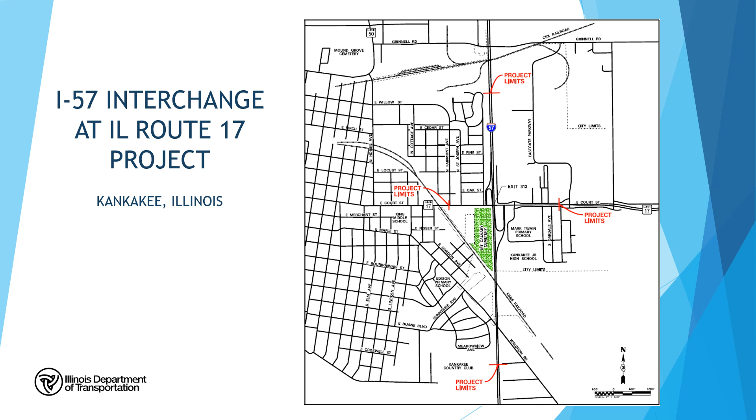Our study area included 1.87 miles on I-57, beginning just south of the structure carrying I-57 over the CSX Railroad, and extends about 1/4 mile south of Waldron Road. On Illinois 17, the project limits include 0.75 miles of roadway that runs from North Fairmont Avenue to Eastgate Industrial Parkway.

The purpose of the public involvement is to present the approved alternative, answer questions about the project, explain land acquisition procedures, and receive public comments.

The need for the proposed design stems from the existing ramp geometry not meeting current IDOT design policy. The existing I-57 structures over Illinois 17 also provide less than the desired vertical clearance, but do meet the minimum to remain in place. Both bridges for I-57 over Illinois 17 are in acceptable condition, but less than optimal. The proposed improvement will help improve roadway design elements, improve traffic flow, and increase safety.

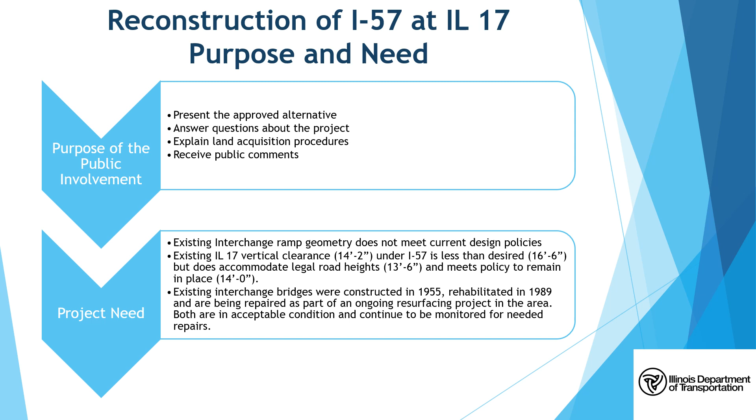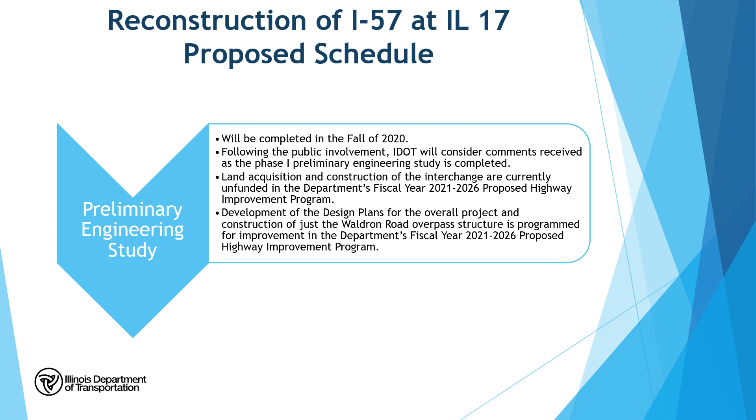This fall, the preliminary engineering study will be completed along with the preliminary Phase 1 design plans. The intersection design study has already been approved. After this, the project will move on to Phase 2. During Phase 2, the final construction plans will be prepared. The Phase 2 work is funded in the 2021 to 2026 proposed highway improvement program. However, only the Waldron Road improvements are funded for construction at this time.

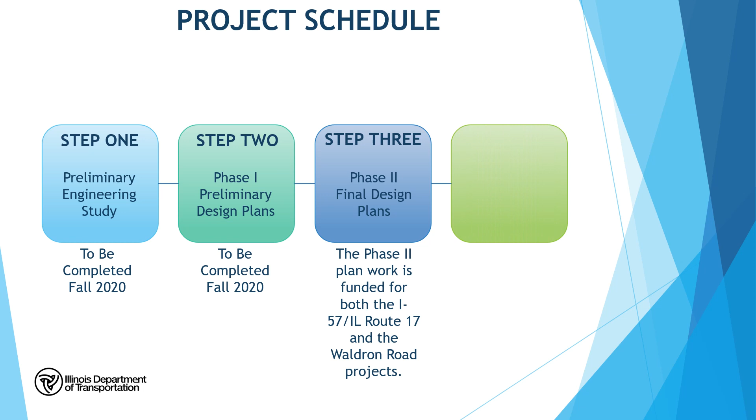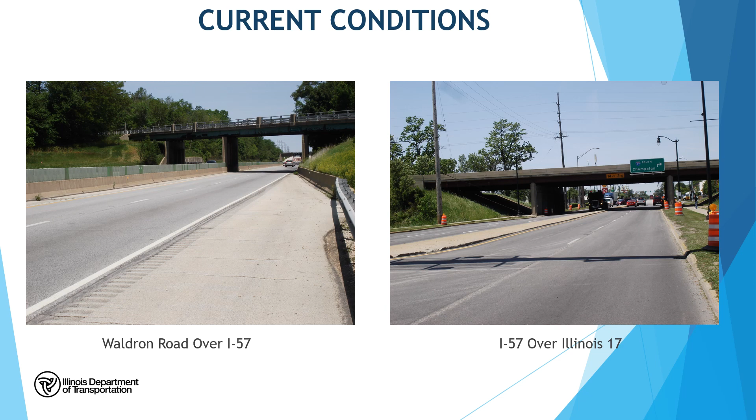These are the current conditions at I-57 and Illinois 17. This is the current layout of the I-57 on and off ramps.

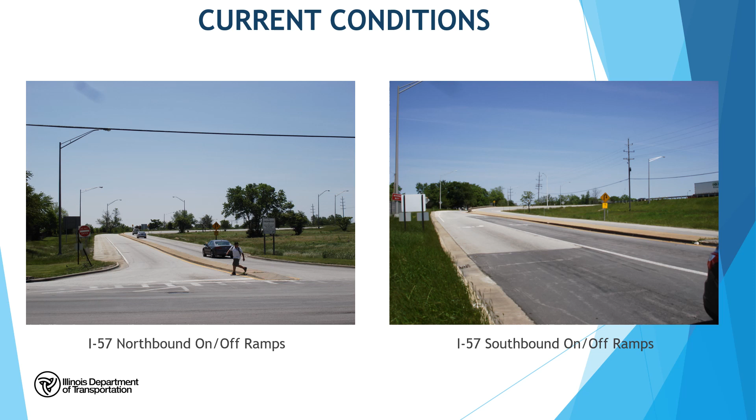The chosen design alternative includes reconstructing the existing interchange using a single-point urban interchange that will account for future widening of I-57. A single-point urban interchange creates a circumstance where all of the ramps meet in one signalized location instead of having two closely spaced intersections. This type of interchange is used in urban areas with limited space and higher crossroad traffic volumes.

The single-point urban interchange allows for better traffic progression and should help with traffic backups. The single-point urban interchange improves access to each ramp from Illinois 17. I-57 will be shifted to the east to avoid impacts to the Mount Calvary Cemetery. Illinois 17 is designed to provide necessary turn lanes, and the existing traffic signals will be maintained, upgraded, or relocated to improve traffic flow.

Noise walls are also proposed in some locations along I-57 to help reduce traffic noise to adjacent properties. More information on how noise walls are studied and how proposed locations are determined can be found on the project website. Retaining walls are proposed in some areas to limit right-of-way requirements. As part of this project, the existing drainage system will also be improved.

The project will also include removing and replacing both the Waldron Road and KB&S Railroad bridges over I-57. This will accommodate additional future through lanes on I-57 and address currently needed repairs. A cul-de-sac will be built on the north frontage road.

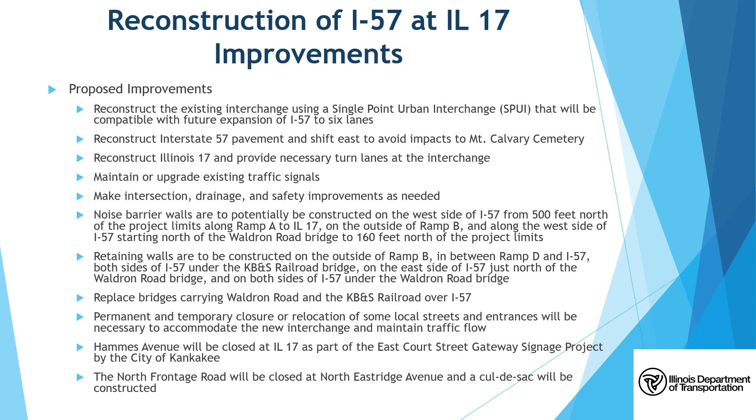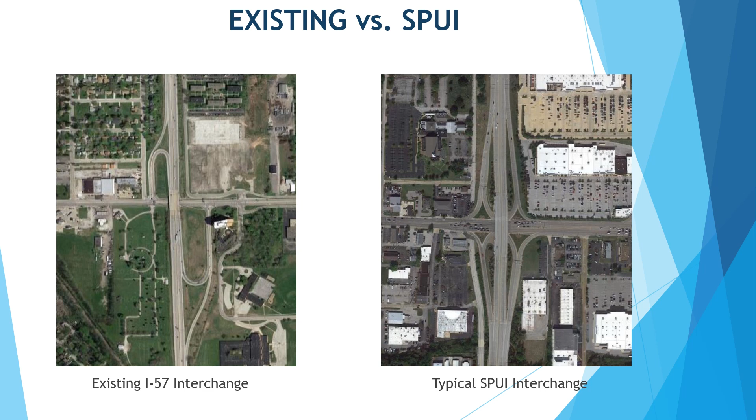Level of service maps are included to help illustrate the benefits of the proposed improvements. Level of service, or LOS, is a performance measure used to compare potential changes in a road system, whether from a change in traffic volume or an improvement. For an intersection or roadway, the LOS is assigned based on traffic flow and delay, with A being the best and F being the worst.

The existing conditions at the intersections surrounding the interchange have a LOS A or B, which is the optimal result. However, for year 2040 traffic analysis, some of those drop to a C and a D. With the proposed plan in place, the LOS values stay at an A or B level.

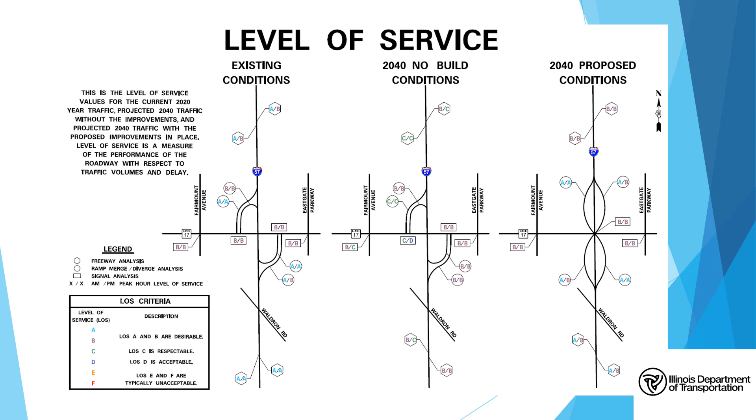The level of service map on the left shows the LOS under current roadway and traffic conditions. The middle level of service map shows the LOS in 2040 if no significant roadway improvements are made, but traffic volumes continue to increase. The level of service map on the right shows the anticipated LOS under the proposed roadway conditions and future traffic. The speed limit map shows the current posted speed limits for the project study area.

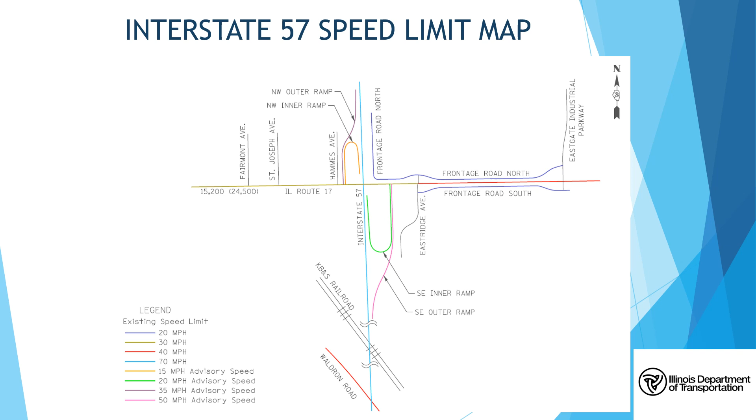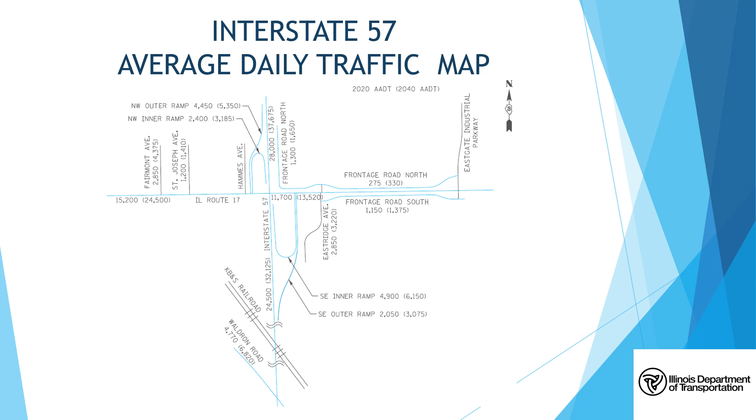The average daily traffic shows the 2020 daily traffic volumes, followed by the future 2040 projected volumes in parentheses. The proposed project requires approximately 14.5 acres of right-of-way to be purchased from about 143 total parcels. This project will also require about 2.35 acres of temporary easements and 1.87 acres of permanent easements for construction. 5 sheds and 1 concrete pad will need to be removed for this project.

The noise study revealed 493 receptors with highway noise impacts. The proposed noise walls are anticipated to reduce the impacts by 5 decibels or more for 254 of those receptors if they are constructed. During the Phase 2 design, the department will contact benefited receptors, property owners, and tenants to determine if noise wall construction is desired. More information on how noise walls are studied and how proposed locations are determined can be found on the project website.

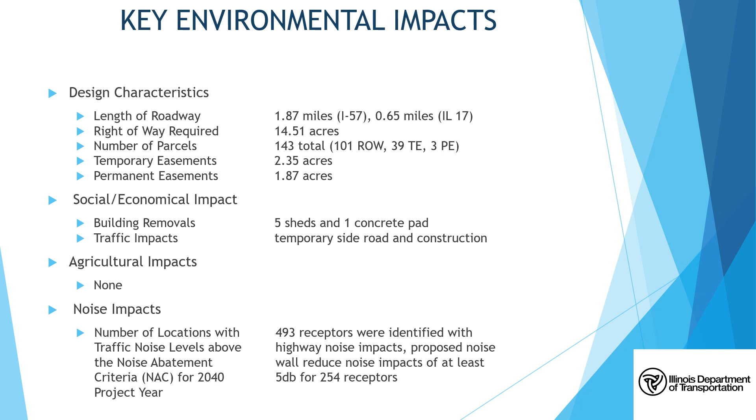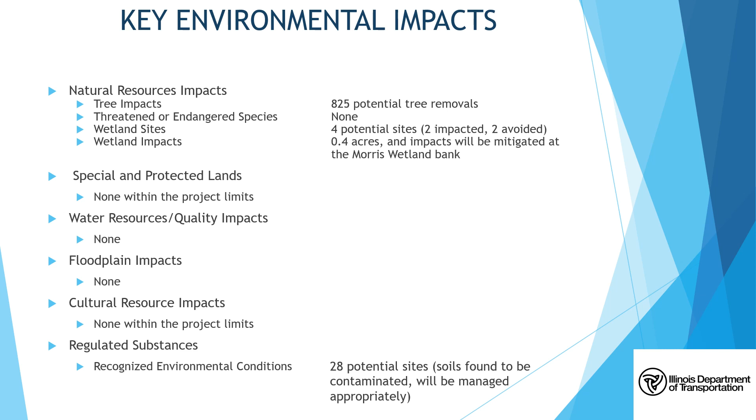There are also 825 potential tree removals, 0.4 acres of wetlands impacted, and 28 sites with potential regulated substances to be managed. It is anticipated that both the tree removal and the wetland impacts will be mitigated. Aerial exhibits have been added to help visualize the proposed improvements on I-57, Illinois 17, and the surrounding road system.

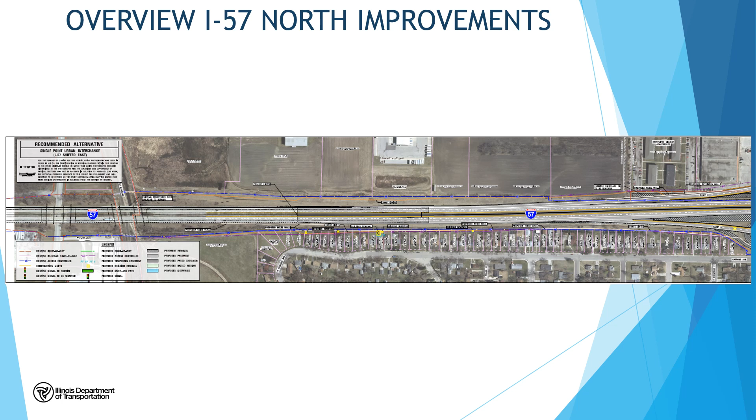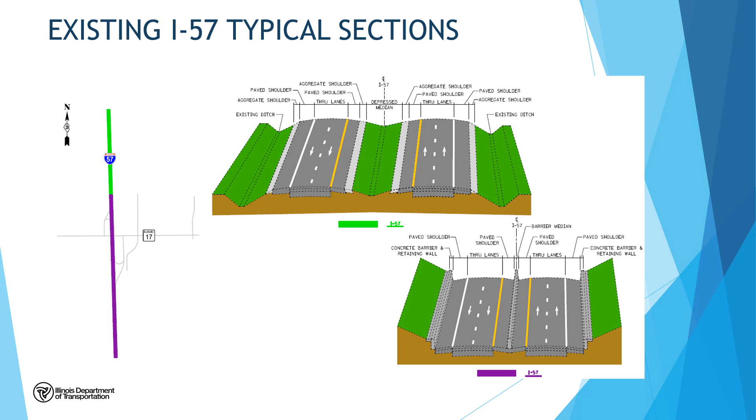On I-57, the proposed improvement will be for a 4-lane facility with wide shoulders and a closed median with a barrier wall. This improvement is being planned so that a 5th and 6th lane can be added in the future if needed. The interchange has been designed for this future 6-lane facility, so additional modifications to the interchange to improve capacity are unlikely. This proposed improvement will tie into the new structure carrying I-57 over the CSX Railroad and Grinnell Road to the north.

New auxiliary lanes will assist drivers in speeding up to merge with traffic or slow down to exit I-57. The median at the southern limits of the project will widen out to tie into the improved roadway nearing the Kankakee River.

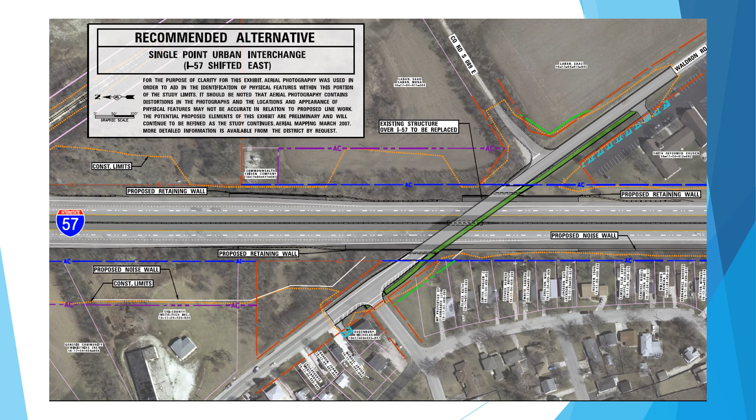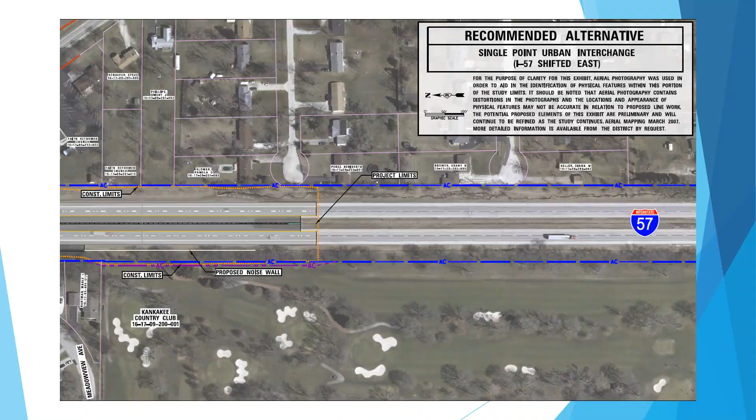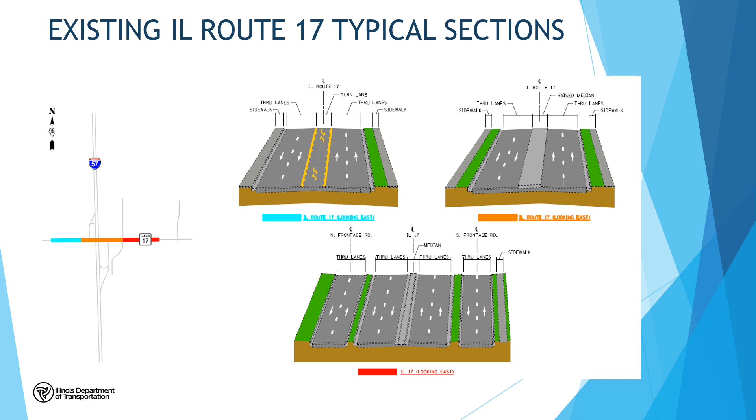Here is an overall aerial view showing all of the proposed improvements on Illinois Route 17. These are the existing typical cross-sections of the roadway, and these are the proposed typical cross-sections of Illinois Route 17.

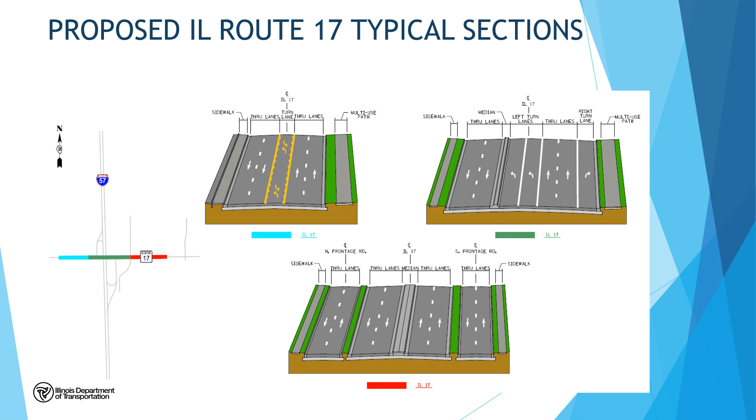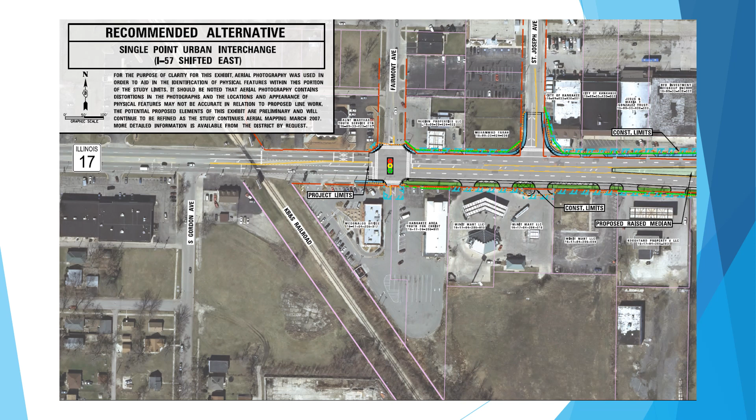On Illinois Route 17, entrances will be reconstructed and will allow for a sidewalk along the north side of the road and a multi-use path along much of the south side of the road to improve mobility for pedestrians and bicyclists. Minor improvements are anticipated at the intersection of Illinois Route 17 with Fairmont Avenue. Heading east, a raised center median will be added to maintain space for dual left turn lanes for vehicles entering I-57. There will also be dual left turn lanes for vehicles exiting I-57.

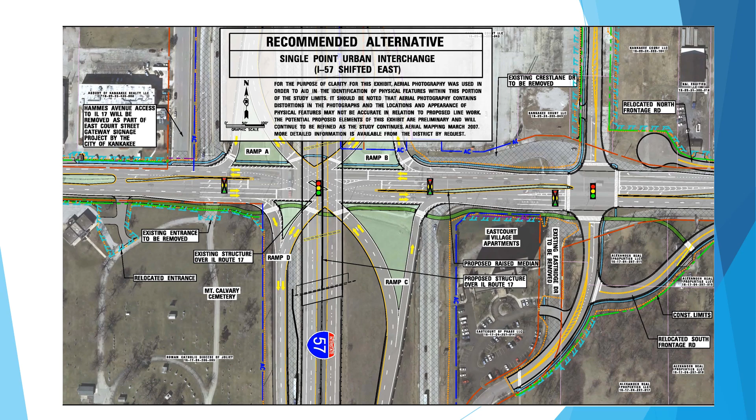Right turn lanes will be added for all movements at the single point urban interchange. The intersection of Illinois Route 17 and Eastridge Drive will be shifted to the east to maintain space for the left turn lanes at the interchange and also at Eastridge Drive. Left turn lanes will be provided for all movements along with right turn lanes on Illinois Route 17. Portions of the frontage roads north and south of Illinois Route 17 will also be reconstructed.

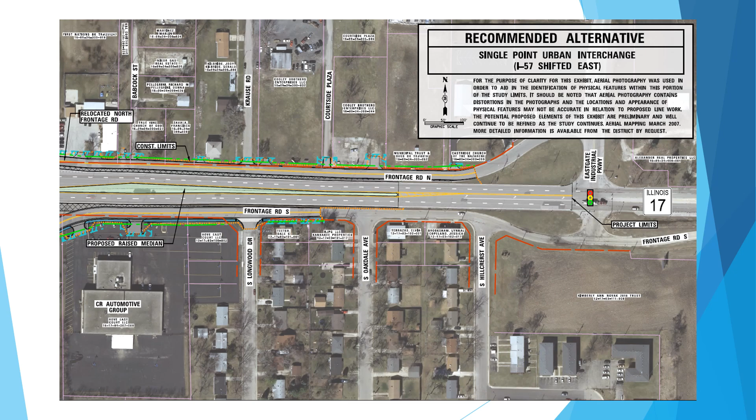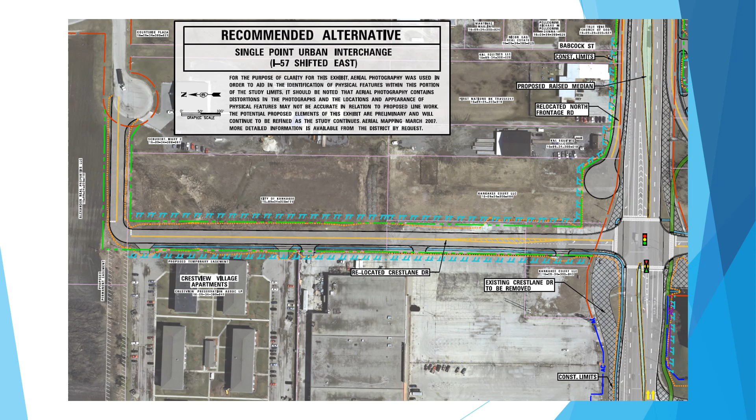Crestlane Drive will be relocated to intersect with Illinois Route 17 at Eastridge Drive. The relocated roadway will be designated as Eastridge Drive North and will intersect with an extension of Eastgate Industrial Parkway to provide improved access and connectivity.

To view project information and provide comments, please visit the project website. Comments and concerns can be added to the comment form and mailed back or emailed to David Alexander of IDOT at david.s.alexander@illinois.gov. Additional contact information can be found on the comment form. Comments received by October 31st, 2020 will become part of the public record and will be posted to the project website along with the department's response.